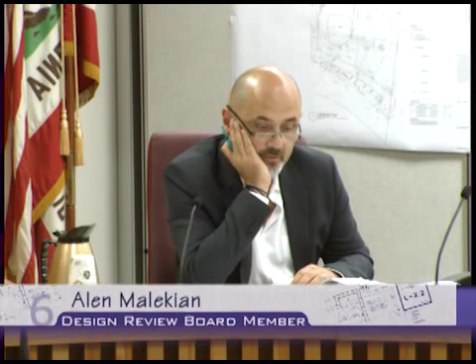Yes, so my first question: if the original proposal that was proposed in January 2014 was ultimately denied by the Planning Commission, where did the roads and driveways come about? Was that permitted? Was there any permits or grading permits or anything?

From what's existing now, sorry, go ahead. No, I'm just wondering how the road, the two roads I guess, came into existence - I don't know at what point. The question is, did they pull a permit to build those roads? I don't know. I'm asking - well, whatever was done was done without a permit. Yeah, and that's fine, that's fine. I just need to know what we're dealing with as far as what's permitted and what's not permitted.

Yeah, our engineering staff can help with that, and I'm not sure if they knew that we reordered this, so I'm going to run upstairs to try to... They're here. Oh, hello.

Sorry. Well, if you don't mind, yeah, I would like to open it up to extended city staff, please. Please come up to the podium and state your name for the record.

Good evening, my name is Dennis Ambayak, I'm the city engineer. I heard a question: was there a permit pulled for the roads and the driveways and the pad, or a partial pad that was created?

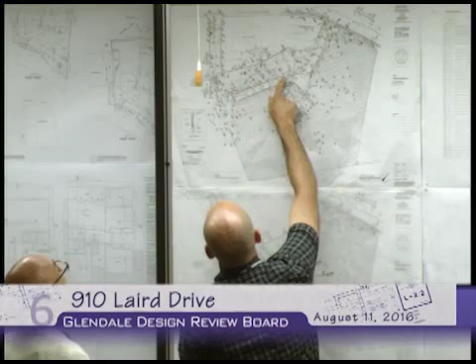Yeah, okay, thank you. Can I ask a question? Of course.

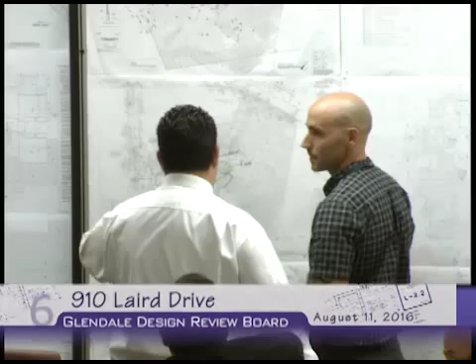The initial proposal that had the house offset, the 3A proposal, staff mentioned it wasn't approved because it was encroaching on the sycamore tree. She also mentioned even if it was moved, pushed to the side or front, just to miss that tree, it still wouldn't be approved. Is that correct? Correct. In one of the original sites, the tree would actually be inside the footprint and had to be removed. The other alternative sites would be within the drip line of the tree where the critical roots are, so in effect we'd just be cutting a bunch of roots off the tree, and it'd be hard to keep the tree healthy in that environment.

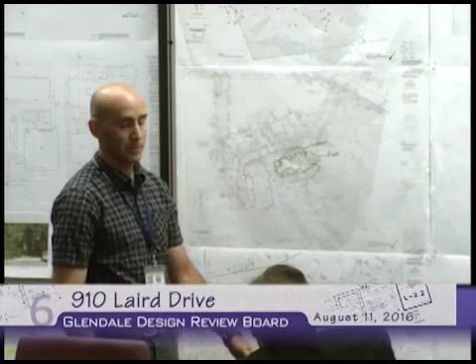But following with that, based on the decision your predecessor made, she caused them to create a driveway and cut God knows how many cubic yards, impacting how many trees' drip lines, including this one, by just not impacting one or possibly this tree. Is that something she had in mind, that she wanted to avoid impacting that one but the rest was fine?

As far as the indigenous trees on the site, from what I saw, I felt it was much easier to mitigate the impacts to the trees with different types of driveway designs, and how much you wanted to grade and dig into the ground, as opposed to the foundation of a house and the actual two-story structure that would stand there.

Do you know when they did the grading of the driveway, was the city, your department, notified? So you don't know if any of the roots or anything was damaged?

No, that was before my time. However, based on the appearance of the trees, for the most part they appear in generally good condition, a bit drought-stressed, but there doesn't seem to be any relationship to the trees along where they graded. The trees near the graded area don't seem to be suffering worse than the other trees on the property.

Any other questions for staff?

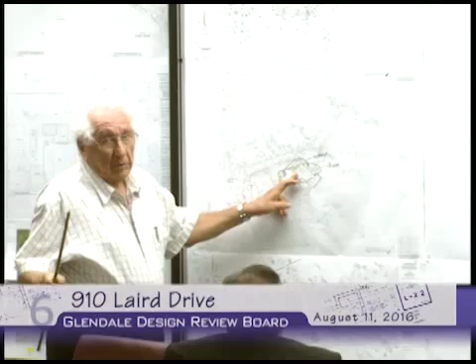The old design was here, not exactly here, it was here. Then we changed that design from here to here. And then we had several meetings with the Homeowners Association, and they objected to this. So we designed here. As you know, the arborist of the city of Glendale rejected this location.

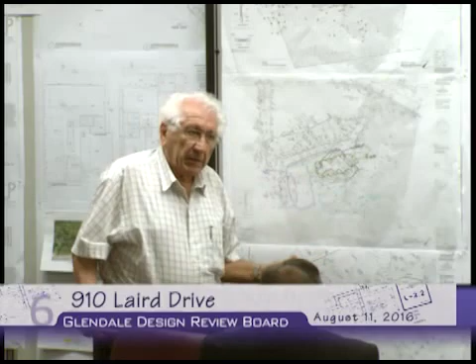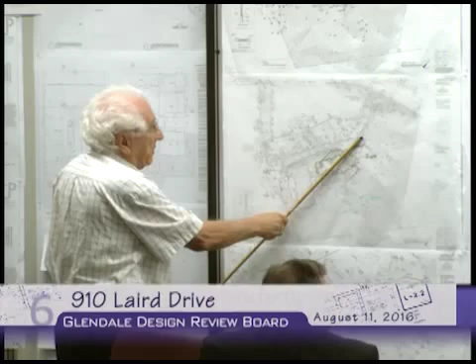Then we had another 3 meetings. In one of the meetings, we suggested having a driveway that would go up here, so it would be away from these properties here. No matter what we did, the Homeowners Association and the neighbors, each neighbor had their own comment about the location of the house. So since we couldn't build here, here, here, or here, we went back to here, which has the view, and the windows are directed away from these properties, and what you will see is this in that direction, or in this direction.

That's the previous plan that was submitted, I think, to the Planning Commission.

Now, regarding the size of the house, the size of the house is 3,740 square feet. Of that 3,740 square feet, 312 square feet is corridors in the garage, so in fact the house is 3,428 square feet. The original design by the other architect was 4,143 square feet plus 500 square feet of guest house. We don't have any guest house. There is a house in Chevy Chase, not far from this property, at 2,500 Chevy Chase, that is 3,729 square feet with a 24% floor area ratio, while our floor area ratio is 4.7%.

By the way, we have 1, 2, 3, 4, 5, 6, 7, 8 people right in that neighborhood supporting this project.

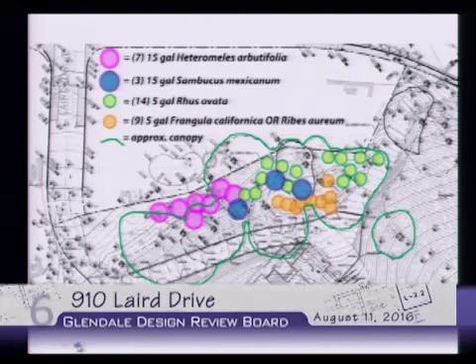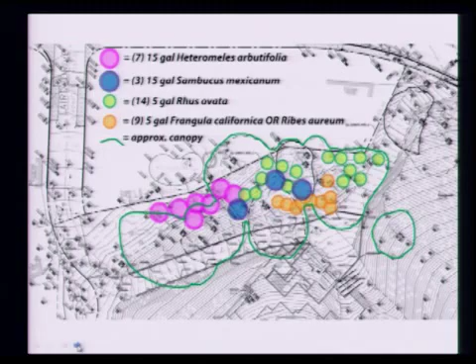Right now I'd like to talk about a rough landscape plan we have, to address some of the neighbors' concerns about privacy, especially between their pool, which you can see above the purple circles, and our property. We're proposing to plant many native drought-tolerant screening species on the hillside just below the driveway to provide more privacy for the neighbors. These include 7 15-gallon Heteromeles arbutifolia, or toyon, 3 Mexican elderberry, 14 sugar bushes, and 9 Frangula californica, or Rhamnus californica, golden currant.

Next slide please. And this is just giving the raw details of how big the plants should be as they're going in.

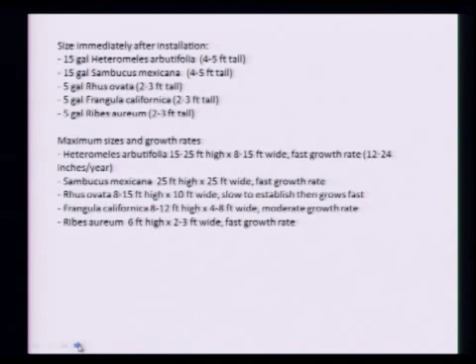In the area right by the pool, the toyon bushes will be 4 to 5 feet tall as they're going in, but they have the potential to reach 15 to 25 feet high by 8 to 15 feet wide, which should provide lots of adequate screening.

We plan on using slightly smaller size containers right now because we plant smaller size plants. They establish more quickly, and they can actually outgrow plants that are put in at a larger size. So this way, in 3 to 5 years, it's very possible that the plants we plant now in 15-gallon and 5-gallon containers will actually be bigger than if you put in something in, for example, a 24-inch box.

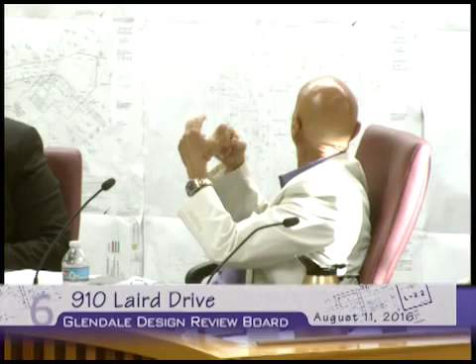And I'll support a house located off of Laird. I know Chevy Chase is hard. This central location will impact the neighbors. There's no way to screen this. I could see the plans. There's no windows off of that elevation, with the exception of the entry door and a couple of small punched openings. And that's not the proper way to approach it also. So with that, I'll see what my other colleagues have to say.

I tend to agree with my colleagues on the comments they previously stated, and for the sake of time I'm not going to repeat all of them. I just want to say that in its current location where it's sitting right now, it's impacting the two neighbors right adjacent to it. It's also impacting all the guys that live on the canyon on top. As Mr. Malikian stated, I took the drive up as well, and when you look down, I can see the story poles. It was like that's the only thing standing.

So the gentleman that provided that photograph, that's pretty accurate. That's the view I saw. So I will not support the project where it's sitting now, but if it's off of Laird, I'll be in support. It's a beautiful, beautiful design. I like the material, I like the style. It's a beautiful house. Mr. Hagopian always does beautiful homes. So I just have an issue with the location. And that's about it.

So I agree with those last comments specifically. I think that the house, as designed with the materials, is a very good design, not for this lot, not for the actual conditions that we have here. As far as relocating the project potentially to Laird, I think that forestry was probably most concerned about the large sycamore tree that I saw this morning, and I'm assuming that was the main concern.

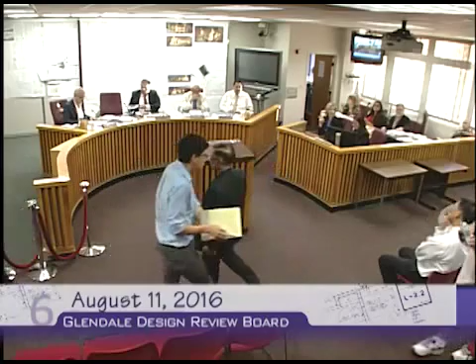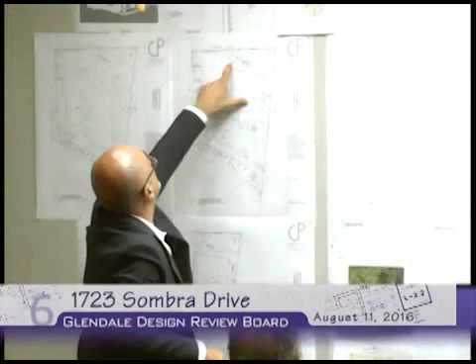No, they go up to the trunk, like hitting the trunk. No, I wouldn't say it's hitting the trunk, as far as rule of thumb. This is the trunk right here, if you want to come up. Is that a dimension line at the trunk? No, look, that's the tree trunk. This dash line is right there - that's the balcony line above.

So I'm just wondering, there's a foundation, there's a post there, and it's right there - not the dimension line, but the dash line, the second floor line. So is that okay? You think it'll be okay? So you're saying this is the pad of the house right here, or is this the second floor dash line, that's the post, and these are the double trunks, so it's right there? Yeah, as far as it doesn't interfere with the trunk or canopy significantly, and it's not going into the roots because it's above ground, then they can coexist.

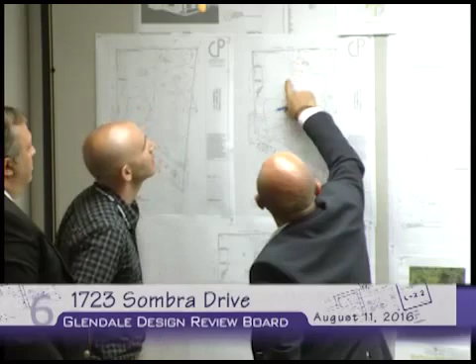And number 11 is not being removed, right? No. I believe the two that are being removed actually sit within the footprint of the house itself - right next to 8 and 9, and 10. Got it, okay, that's all I wanted, thank you so much.

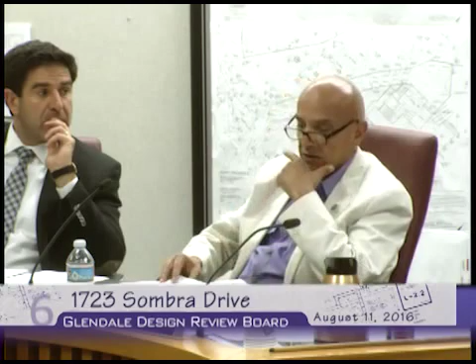I don't know. The reason it sounds so familiar is we had a lot of oak trees on that property. And the last house that he did, he promised us there would be no encroachments on the oak trees. But I was there during construction, and neighbors were complaining to me. When I went and looked at it, these oak trees, the limbs were really projecting into the framing. Are we going to face with these kind of situations here?

I can't speak for Robert. I don't know if it's the same Robert Hall. I don't know what he's developed in the past. He's not the same one? Okay, I apologize then. It's okay. Because I don't want to run into that problem. It's still a common name.

So one question I'd like for you to address is Ms. Stanley's question on construction staging. How are you going to achieve construction staging, and what do you have in place as far as thought process? It's still something that we're reviewing.

Any ideas? The adjacent lot is actually one of those ideas, yes. The driveway runs the full length of the property, and the easement that we've granted them extends out into ours. There's very limited oak trees over in that area, so we think it's pretty ideal, but I can't say for sure. Do you have a right to use it? We'd have to ask the current occupant if we can.

Okay, but I'm so sorry, can I add to that question? Construction staging isn't just about drop-off of supplies and so forth. I understand, it's about ingress and egress and all that. So has that been considered? I took my small car this morning because I knew that was going to be a narrow street, since I've been there before. And I didn't take my larger, truck-sized vehicle because I knew I was going to have a tough time getting out of there. So have you considered that? I believe Robert is considering that, yes.

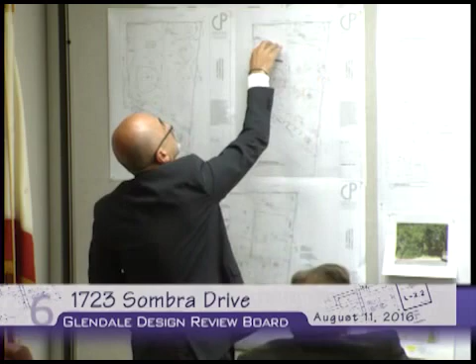I don't know why it's not being used. One of the neighbors, I think it was Stanley, mentioned why aren't we utilizing some of this property? Why can't we just create an L-shape design? This thing is overlooking, opened up, overlooking these. So there's different options rather than looking at this square box.

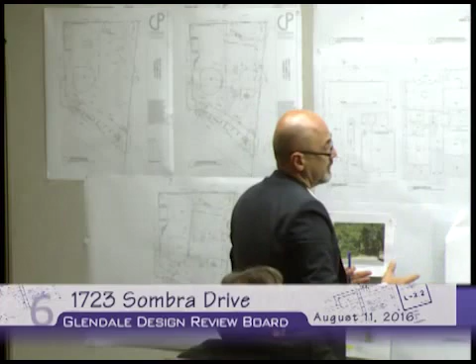To me, yes, it is stepping back a tad bit on this side, but it's definitely the spacing, the orientation, and the way it's designed. It's not really taking into consideration what's around there. It's basically the design came first, and then let's mitigate and deal with some of these trees that are being impacted.

One of the trees to be removed, that's fine. The pruning, I don't know what the impact would be on these. From my understanding, the roots are at the drip line of the oak trees, correct? So that's an assumption, a reflection of the roots. So pruning some of these trees, I don't know what the impact of that would be. If we go with this, I would put a condition of a special foundation or something there, which I think will definitely reduce the impact on these trees.

But overall, I think I'm okay with the two-story, but I think it's over-designed for the space. It's actually being pushed within the property, and whatever is in front of it is being removed for it to work. So I think it needs to be designed as much as possible with the trees, with the forest of trees that we have there. And I think that would help the bigger picture, the overall. I think it will just massage the second story better, less impact to the trees, and reduce a tad bit on the square footage as well.

Thank you, Mr. Maleki. Mr. Charchi? Sure.

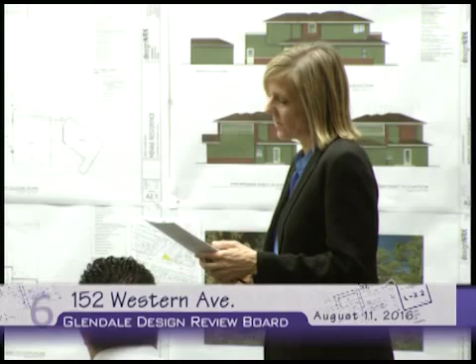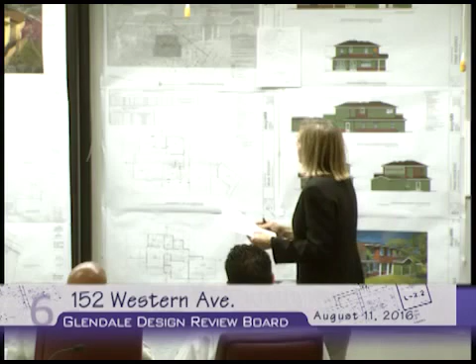You can tell by the site plan, the subject site is an odd-shaped corner lot located on the northeast corner of Riverside Drive and Western Avenue in the horse overlay zone. The lot is only approximately 5 feet wide along the easterly side, along the alleyway, and then it flares out towards Western Avenue. The property features currently a 1,251 square foot single-story house with the attached two-car garage fronting Riverside. There is a detached stable that was permitted in 1963, constructed on the northeast corner of the lot abutting the alley.

The property also features a fence. If you visited the site, there is a picket fence all along the front property line, 0-foot setback. This fence was permitted under a standards variance approved back in 1964, so it's allowed to remain. This particular project is exempt per CEQA as a Class 1 existing facility exemption pursuant to the state CEQA guidelines. As noted in your staff report, it was broken down into 3 sections: site planning, mass and scale, and design and detailing.

The site plan will remain pretty much the same as the existing, except for modifications along the northerly property line, which would provide a 5-foot required setback. Because they are going two stories up, they are required to provide that setback, so they are cutting a portion of the house off to meet it.

They are also removing the illegal patio enclosure between the garage and the stable, and modifying the stable to provide the required 5-foot separation between the stable and the garage. They had applied for an administrative exception to maintain only a 4-foot setback, but that was denied by the planning hearing officer, so they are required to provide the full 5-foot separation.

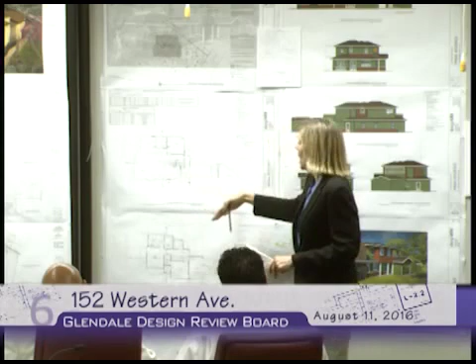There was also a discovery, long ago, that the existing garage currently attached to the house was originally constructed as a detached garage. An entryway was enclosed between the house and the garage, and even though it's there now, they are legalizing it as part of this project. That's the extent on the ground floor; otherwise the site plan remains the same, with the main entrance and garage fronting Riverside Drive, and modifications along the interior of the house and the stable.

The front yard fence can remain, and any landscaping removed during construction will be replaced with drought-tolerant landscaping. No trees are proposed to be removed, and there are no protected trees on this lot.

So with that point made, we go on to mass and scale. Again, this is a second-story addition to a one-story house. The overall height will be 23 feet to the top of the ridge. In this zone, the maximum would be 25 feet for a two-story structure, with an additional 3 feet allowed for a pitched roof, so they are well below the required maximum standard.

The two-story residence will be the third second-story house in the 300-foot neighborhood survey of single-family homes, and one of the largest in terms of floor area ratio. That aside, the project's mass and scale, in staff's opinion, will not be incompatible with the surrounding context.

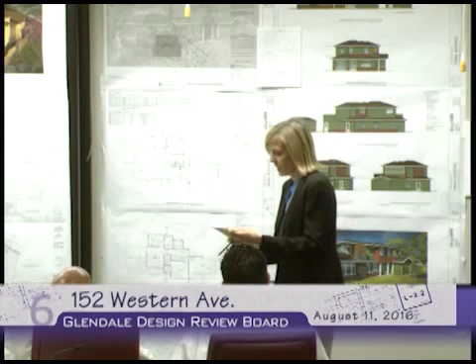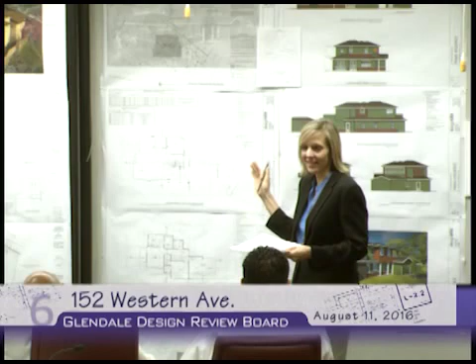The site is a corner lot with a very wide Riverside Drive and Western Avenue, major thoroughfares providing a lot of buffering on these two sides. There's also enough clearance between the home to the north and the subject property, and an alleyway separating the properties to the east, so there's a lot of buffering that allows for the second-story addition and massing.

Also, the ranch-inspired architectural design and the use of horizontal siding at the base help provide a horizontal emphasis, cutting down on the more vertical aspects, and it's pulled back on multiple levels. There's a juxtaposition of certain volumes, giving a bit more play as opposed to just having a two-story boxy structure, as noted, not recommended by the board.

Last but not least, the design and detailing. The proposed residence has been designed with ranch-influenced details appropriate to the neighborhood, this being the Rancho, with low-scale, one-story, primarily ranch-influenced homes. The design features a combination of board and batten siding combined with horizontal siding and stucco on elevations, with a variety of materials: wider roof eaves, window surrounds with wood sills, and wood guardrails and posts.

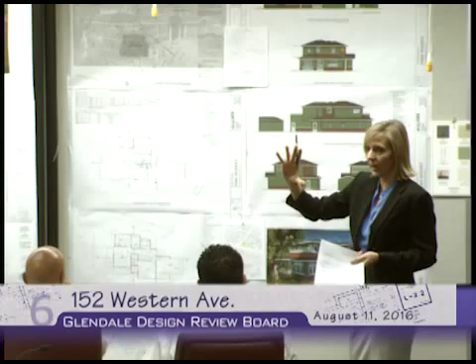The stone chimney is being maintained, along with front doors with side lights. This is the elevation facing Riverside—the entry, if you drove past it, is really nondescript. By having the second-floor roof overhang, it provides more of a covered front entryway with a few more posts, making it a bit more defined than what currently exists, creating more of a focal point entryway on Riverside.

The color scheme for the proposed residence focuses on fern green stucco walls, accented by rust-colored siding, contrasted with off-white trim fascia and dark brown roof shingles. The color palette is much more vivid and earthier than a lot of the neighboring residences.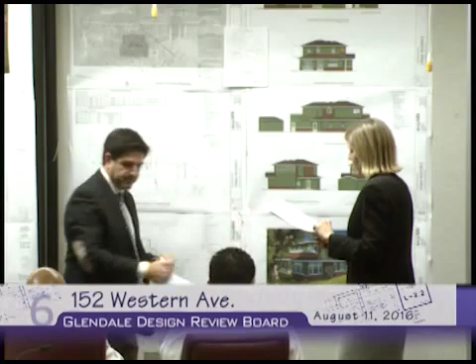But again, the darker colors help blend with the natural environment and are appropriate for the ranch influence design. Design and detail has been found to be consistent around the building on all elevations and appears compatible with the high level of quality in the Rancho neighborhood.

That concludes staff's presentation. Staff wanted to bring this to you as opposed to an ADR simply because it's one of the larger homes and it's introducing a second-story addition in an otherwise single-family, low single-story residential neighborhood. But based on all of the proposed site plan, mass and scale, and design and details, staff supports the proposed project and recommends approval, no conditions.

Any questions? Are we having an issue with 50% here? No, there were calculations done, and they are under the 50% threshold. We made sure that the architect can provide those calculations.

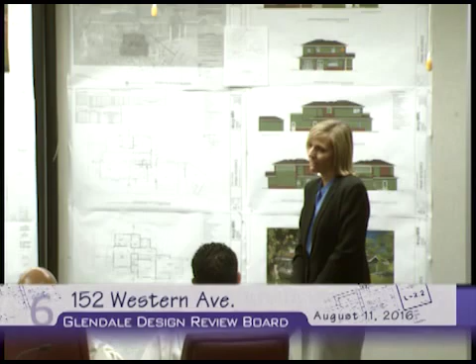Because the whole roof is coming out almost. It is, but the existing walls are being maintained. So the walls are making it work? Correct, so they fall within that threshold. The garage doesn't work if that's the case. No, I know, yeah, there would be a lot more nonconformities that would have to be brought up to code if that was over the 50% threshold.

I have a question. I was wondering, and this board actually helps me understand it better, how they're going to treat that chimney, because that chimney is pretty low currently. So are they going to build it up with, I guess that's called a flue, copper? Correct. Now, as designed, that doesn't look like this. That design and this detail don't correspond. So is it this or is it that? I believe that's the material, and this would be the design, but I'm going to have the architect answer that.

Is this the actual real fireplace? This stone fireplace is the one that's in the photograph. Well, let me ask about this, because it's an existing condition, but it was low, so my thinking was, how are they going to maintain it? Yeah, we can talk about it.

Well, I am unable to find the speaker cards, but there they are. There's only one. Mr. Khodedadi, come on up. Welcome, and thanks for bearing with us for a couple hours. Oh, and here, these are the photographs. My name is Nari Kodadadi. Office address is 417 Arden Avenue, Suite 115, Glendale, California. I am the designer of the project.

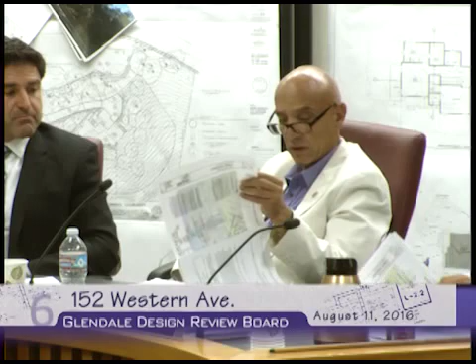I should mention the walls are CMU walls. The existing exterior walls are CMU block walls, not wood. How do you know what these walls are? Are you going to X-ray them to support the second floor? Either that or post and beam design. We did have an engineer out.

So everything is going to be done internally? Yes. You got a challenge there? I know.

Thank you, Mr. Khodedadi. Next speaker is the owner, Shant Minas. Welcome. Thank you, Mr. Chair. I'm Shant Minas. I live at the property and also work in Glendale. I'm a geologist.

Myself and the architect, Narig, we sat with Vilya and Jay a number of times, and we tried to design something that I like. I think Narig did a great job, and we tried to incorporate the comments from city staff as much as possible. The question on termites, like Narig said, the house is CMU wall, so they're staying.

We did do, when I bought it last year, a termite enclosure when they did the bug treatment. So I had it tented. I had it tented for a couple of days, whatever it was. But other than that, I don't know of any issue like that.

That's the reason we're questioning, Mr. Chair, if I may, because the percentage that you have on sheet 2.0 is 46%. We don't want to have an issue where you're removing walls and you're back to this board with a whole new house. No, that's staying.